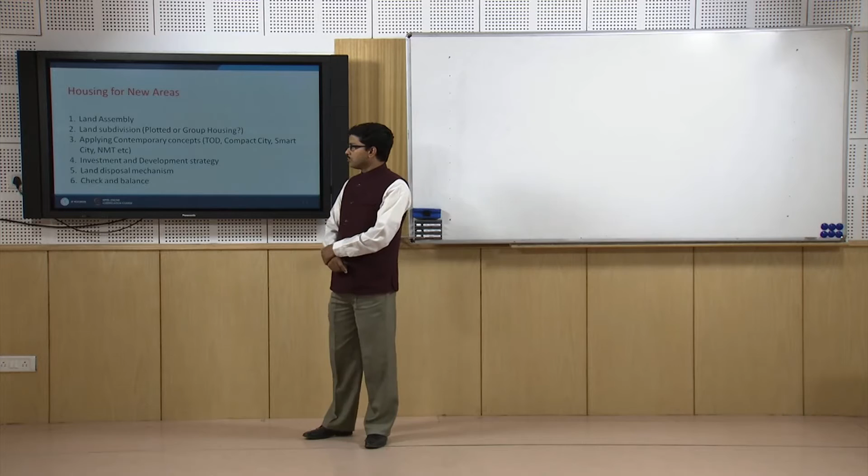We discussed that housing for new areas, the major part of the work involves land assembly, because you need more land to create more housing. So four methods we discussed: land acquisition, land readjustment, development control, or public private partnership. Through these methodologies you can assemble lands.

The second part will be land subdivision. Land subdivision is basically the methodology to divide a bigger chunk of land into small pieces of land based on our requirement, which may be in terms of plotted housing and group housing. We will discuss these one by one today and in the next lecture.

After this we discussed that while we make land subdivision, considering the population and type of housing required, concepts like transit oriented development, compact city, smart city, and non-motorized transportation, and some other concepts should be considered before land subdivision, because land subdivision is the action which will determine the type of housing that will come in a particular plot.

Next we discussed the investment and development strategy. This could be public, by government organization; it could be joint ventures using both public and private investment; and it could be private as well.

Land disposal mechanism: if the land is acquired by the government, that is public land, developed for some township or public purpose. That land should be distributed, allocated, or disposed of through a common lottery system. Otherwise, if it is acquired by a private party or private investor, a separate mechanism can be thought out, and apart from that, there could be checks and balances by the public authority.

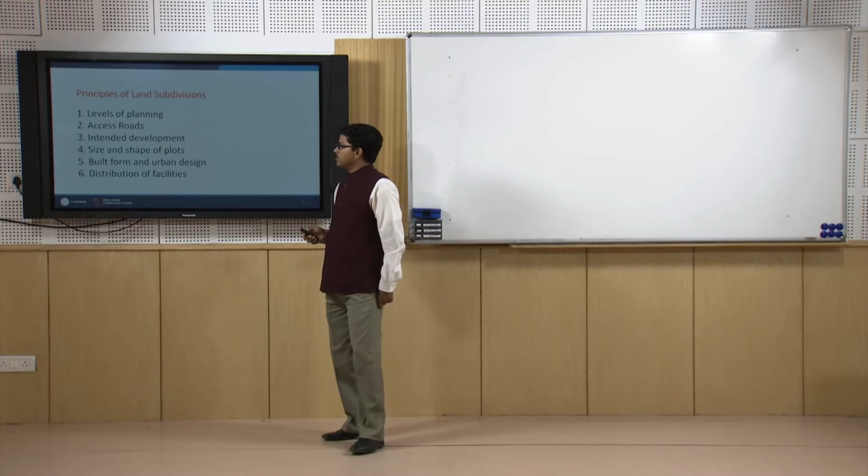We discussed a few principles of land subdivision, like levels of planning. Planning is done at several levels: cluster level, neighborhood level, sector level, and also at the city level.

Based on population, we started the discussion at the cluster level, which is nothing but a cluster of few families, few blocks or buildings which share common facilities in terms of a small open space or small facility. Similarly at the neighborhood level, sector level, or at city or sub-city level, various kinds of facility define its level or hierarchy.

Access roads were also discussed. Two types of access road: local road and collector road. Both give access to the plots. Small roads provide access to smaller plots, bigger roads provide access to bigger plots. The collector road collects all the trips from the local roads and takes them to the arterial road or major junction, so that zone to zone transportation within a city is possible.

Then intended development beyond the city limit, when we go for new housing areas and new housing strategy - our intention, what kind of development, what scenarios of development we want to have. Based on that intention, that vision, how do you want to see the city, those kind of parameters can also influence the land subdivision exercise.

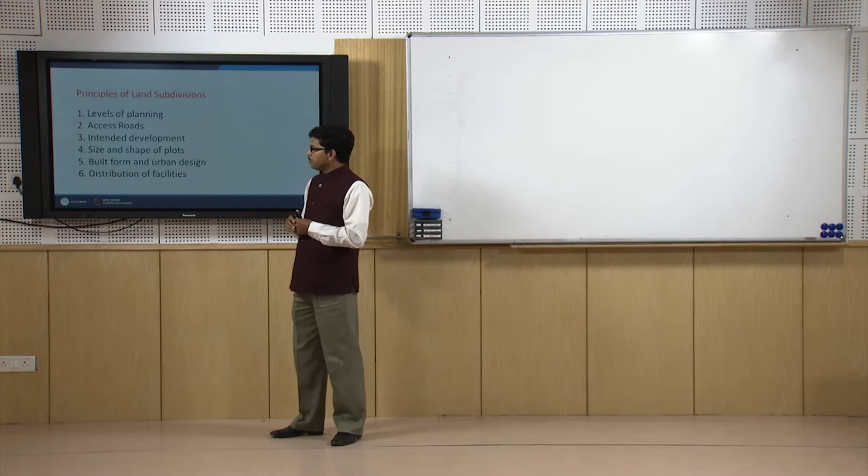Fourth, we discussed the size and shape of the plot. The size and shape of the plot should be such that wastage of land is absolutely minimum, because land is a very scarce commodity. The size and shape of the plot should be optimum, and it should be determined by calculation of the population to be accommodated within the plot, and accordingly the size can be determined.

Then built form and urban design. Urban design consists of more than one building, more than one block, more than one building complex in different plots. That's urban design - how we can bring some harmony, some concept, some visual continuum in a series of plots or building blocks. That's urban design as a whole. Apart from that, there are features like built form, other built forms, which can also be integrated in the overall development of the building.

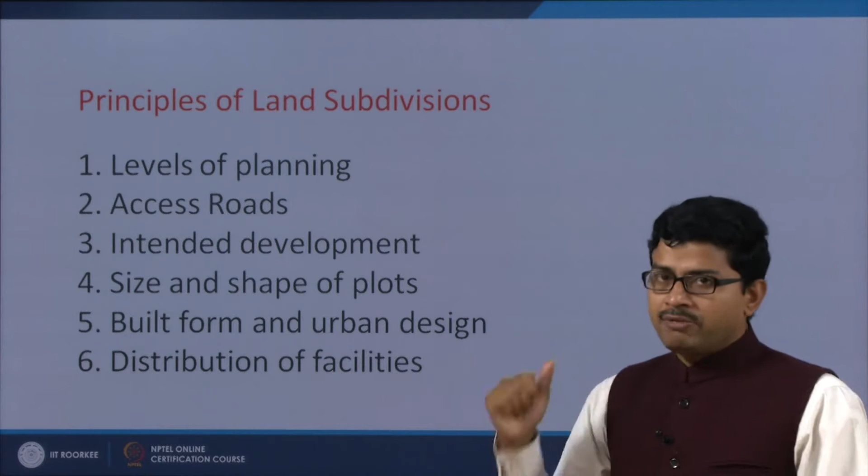Then distribution of the facility, which is done at various levels - cluster level, neighborhood level, and sector level. Now, based on this discussion, we will have a discussion on plotted housing. Plotted housing is one subset of the larger land subdivision around the city.

So around the city, for the new areas we are going to develop for the future population or future housing, some part could be plotted housing and some part could be group housing by and large. Plotted housing, as discussed earlier, is basically small plots.

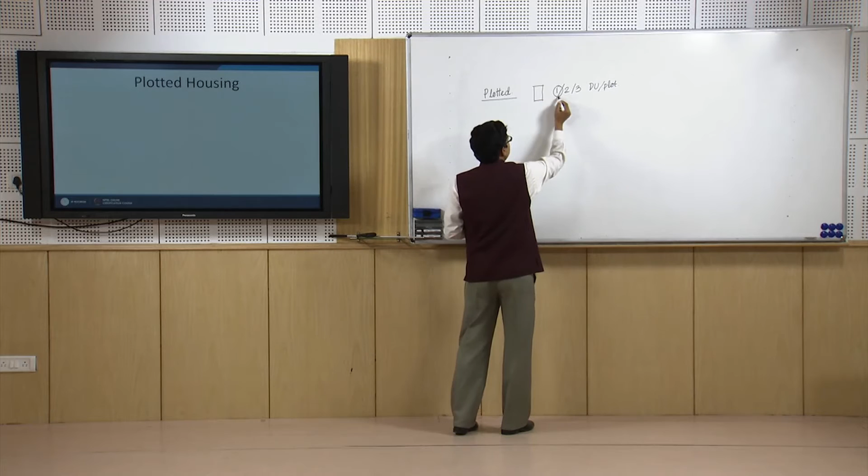Which can accommodate minimum 1, or maximum 2 or 3 dwelling units in a particular plot. So 1, 2 or maybe 3 dwelling units per plot can be accommodated. But here the land ownership or the plot ownership belongs to the first owner, who is owning the plot.

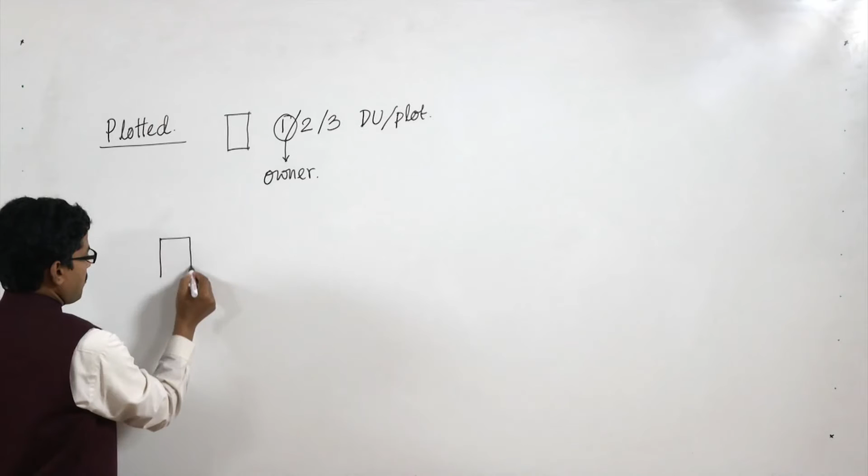And maybe the second and third owners, for them the house can be given on rent. So while we talk about total ownership in terms of buildability, the basic differentiation of plotted housing from group housing is that within a plot the owner enjoys the ownership of the building and the plot both. So if this is plotted housing, ownership belongs to the plot as well as the building, both.

But in group housing, it is not like that. The plot is bigger and there are more number of buildings, so that many people can stay together and enjoy some common facility. Here the ownership of the plot is by community, not by individual, but ownership of the apartment or unit you are staying in is by the individual.

That is the fundamental difference between plotted housing and group housing. Based on that, we will discuss plotted housing and its implication. In plotted housing, an individual owner enjoys sole ownership of the land and the plot. He can do whatever he wants to develop, the kind of building, landscaping, coloring, etc. But definitely some development controls are there that he has to abide by.

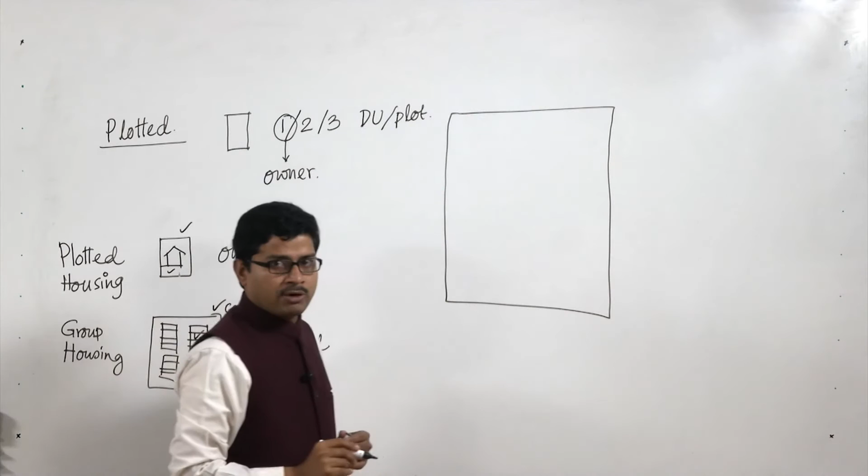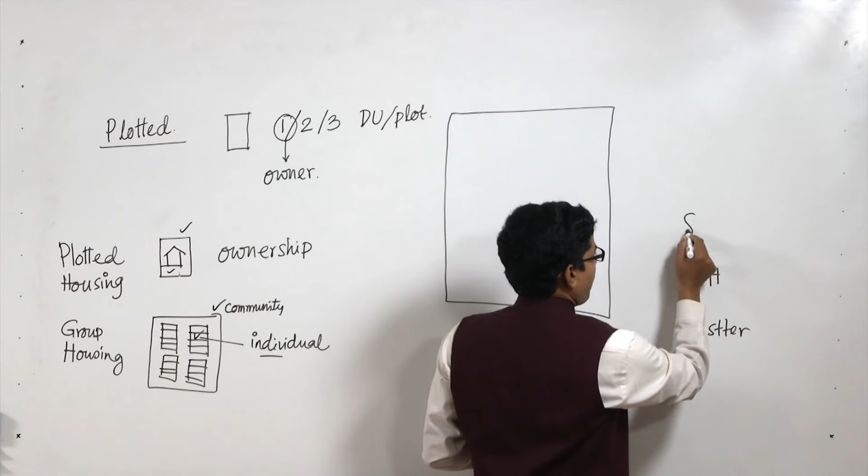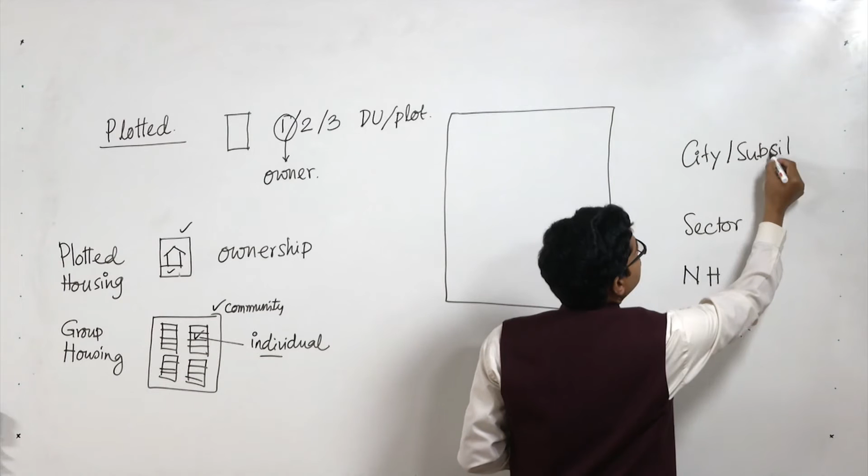Now if this is a neighborhood, I hope you have already understood the concept of neighborhood and cluster. In the last lecture we discussed the concept of cluster, neighborhood, sector, then city or sub-city level. So we are talking about how at the neighborhood level we can further subdivide the plots into smaller pieces for individual owners.

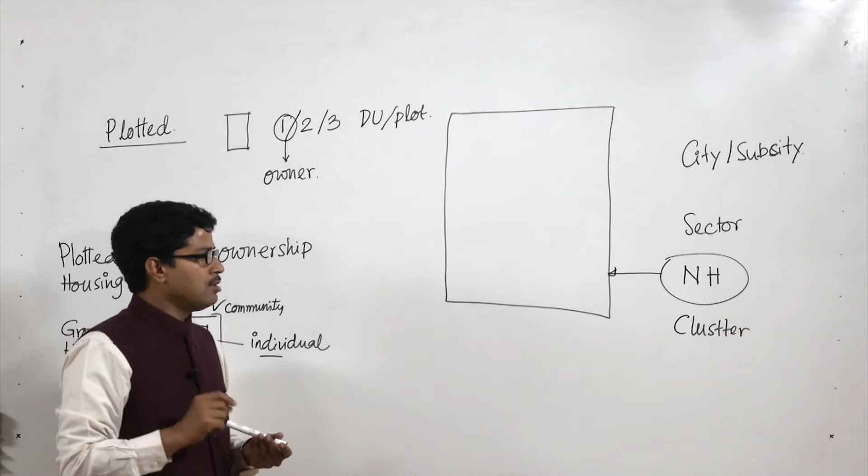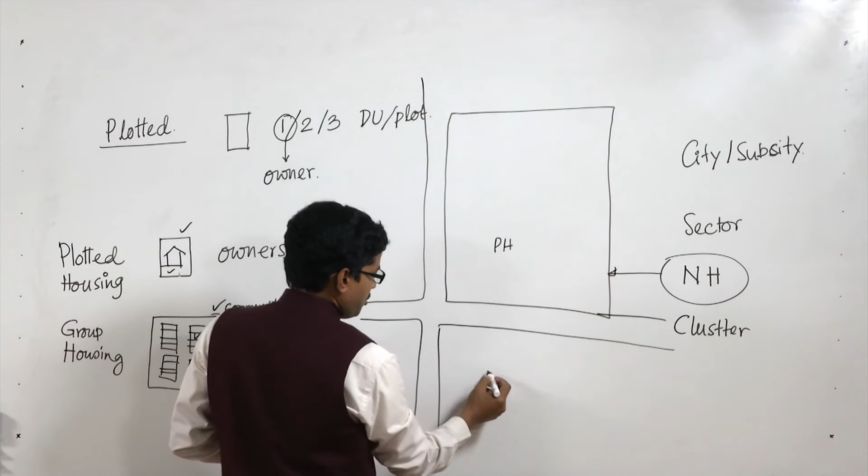That is the plotted housing. So probably you have earmarked various sectors or neighborhoods in overall land subdivision, and you have earmarked this plot as plotted housing, this plot as group housing, or this plot as cooperative housing, whatever it may be. So how will we proceed for the plotted housing?

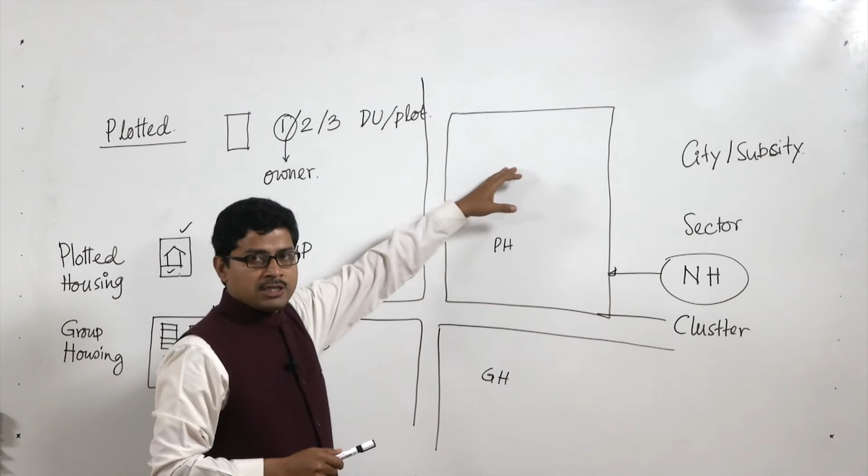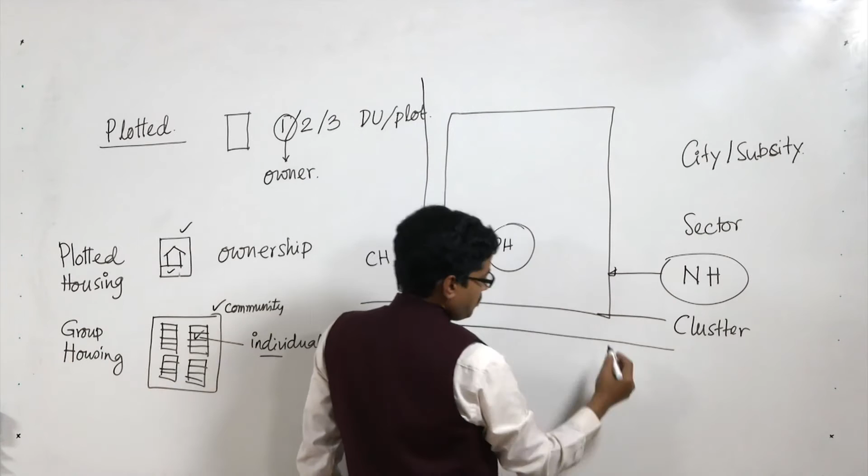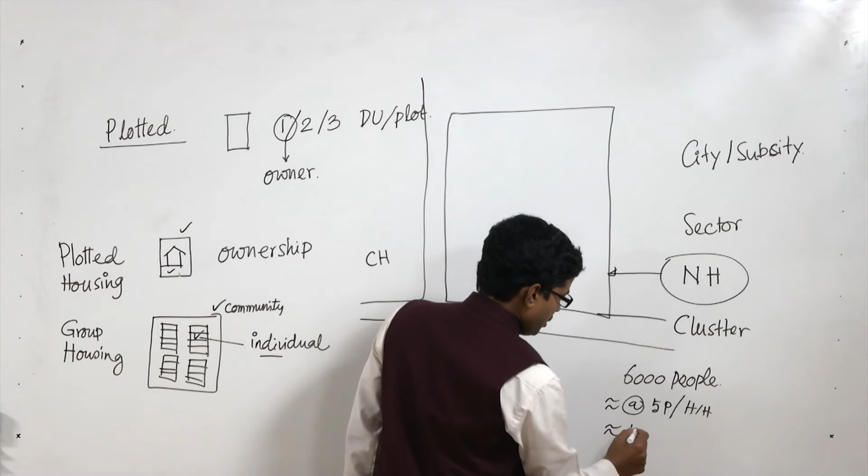Based on the overall housing strategy or city plan strategy, some population will be assumed. Based on the population we can determine the number of plots and the size of plot. For example, in a neighborhood, in a population, we have to accommodate say 6,000 people. If we consider 5 people per household, that will equate to 1200 dwelling units, meaning 1200 families will be living there.

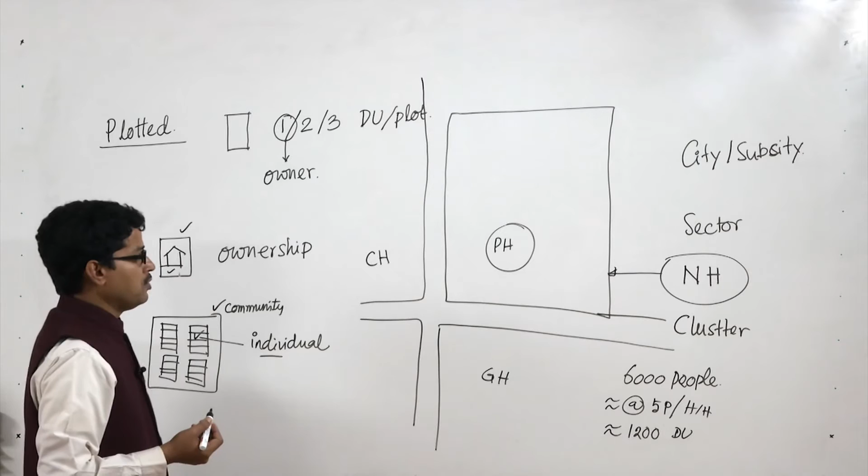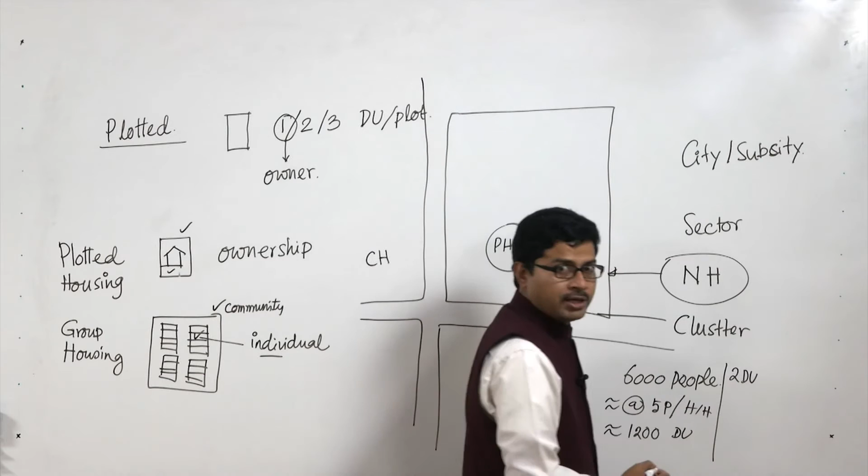So for discussion or convenience, if you consider that two dwelling units or two families will be sharing each plot, then the number of plots will be 600. Now these 600 plots can be higher income group, middle income group, or lower income group.

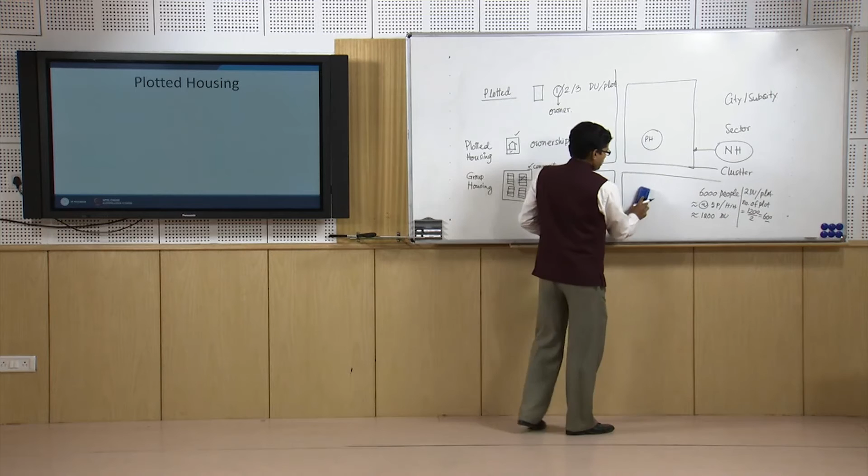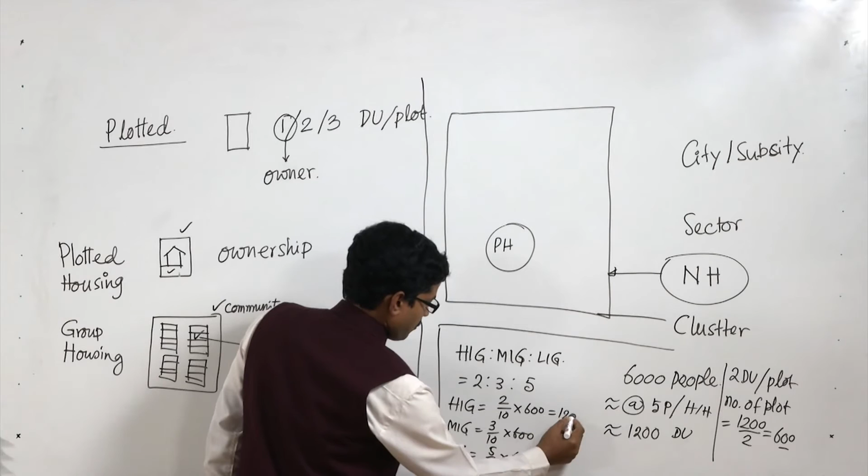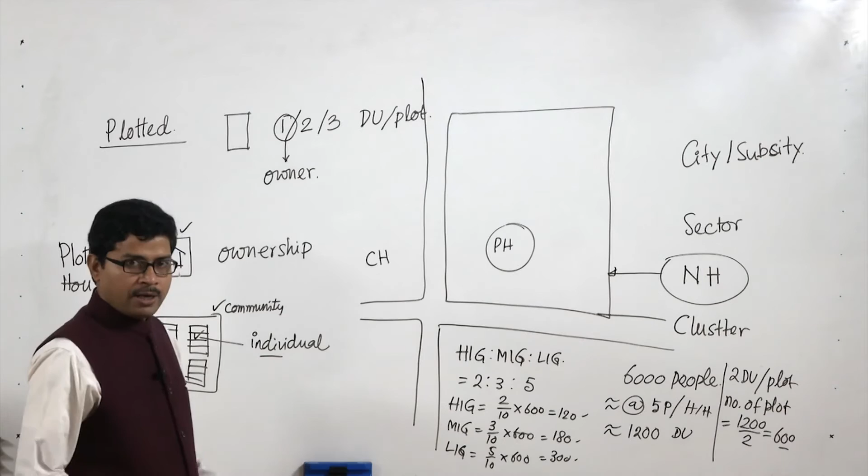Based on your overall strategy or mandate given by the housing strategy exercise, you can determine the ratio. Let us say out of 600, your ratio for different categories of housing is HIG is to MIG is to LIG as 2:3:5. So this is the final number of plots you have to accommodate for each particular economic group.

Now based on their affordability, the size of the plot for higher income group, middle income group and lower income group will not be similar or same. So how do you determine the size of the plot? Let us take another example. For convenience we are calculating in a simplified manner, but the actual calculation could be more intricate. Let us understand at least some basic theory and assumptions, so whenever we work we can execute or apply that with simple mathematical calculation.

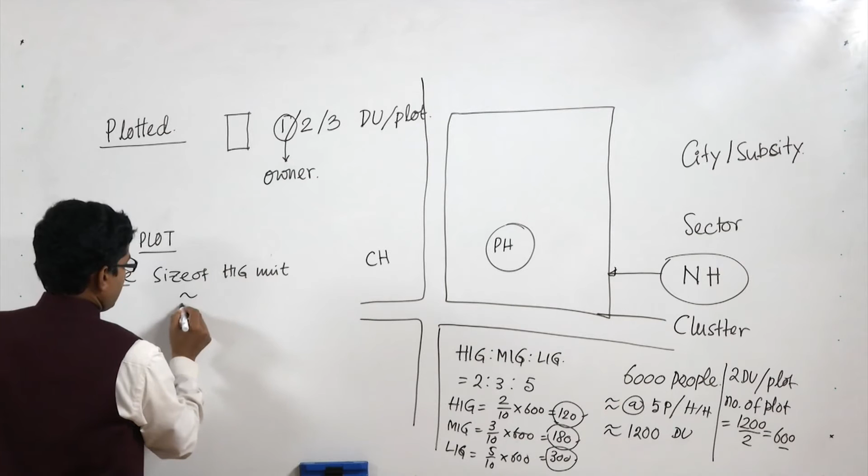Now let us take an HIG plot. Based on the city size or city profile, we can take an average size of the HIG dwelling unit. For example, let us assume the size of the HIG unit is 150 square meters.

We are assuming the plot can be 200, 120, or any amount - let's say 150 square meters. If we want to accommodate 2 units per plot, this is the built up area. So built up area per plot, considering two dwelling units per plot, will be 300 square meters. This becomes the total built up area in a plot for a higher income group plotted housing plot. Now let us go to the discussion of floor space index.

2-3 lectures back we discussed that density is very much related to the concept of floor area ratio or floor space index. FSI is nothing but the total built up area divided by the plot area. Now if this is the total built up area, and let us assume the plot area as A, based on our FAR formula we know FAR is equal to total built up area divided by plot area. So you can check the building regulations and development control whether the FAR provided for that area is 2, 1.5, 1.75, or 2.5.

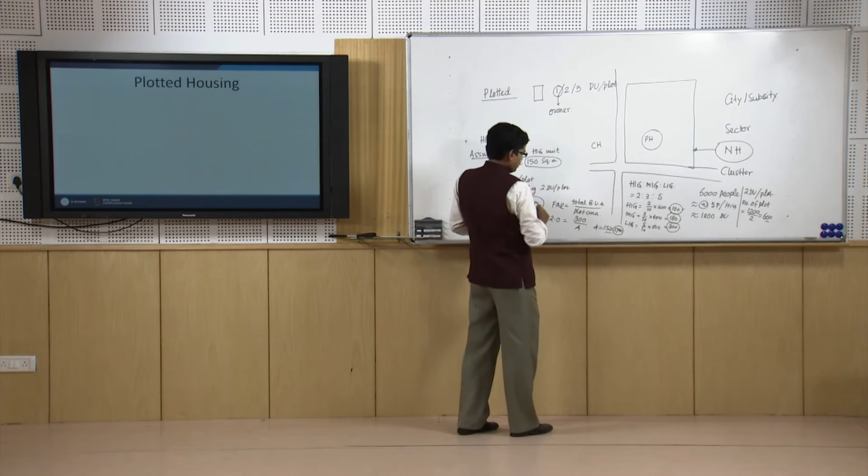So let us assume that FAR is 2, and total built up area we know is 300. So plot area is A. Therefore A is equal to 150 square meters. So this becomes the size of the plot. Similarly we can calculate the size of each plot for HIG, MIG, and LIG.

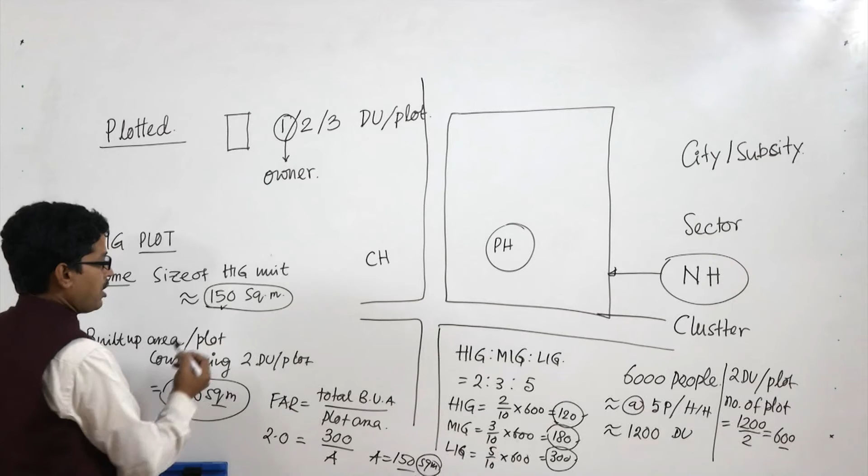Now if you want to make a variation of plot sizes, it is possible that within the same economic group you can bring a little more variation. For example HIG2, HIG1, HIG3, MIG1, MIG2, MIG3, starting from the basic unit to a little higher unit to a little bigger unit. So instead of 150 square meters per unit, you can consider 120 square meters, or 200 square meters. So HIG could be 200, 150, 120, and we can assume MIG as 100, 80, or 60 square meters.

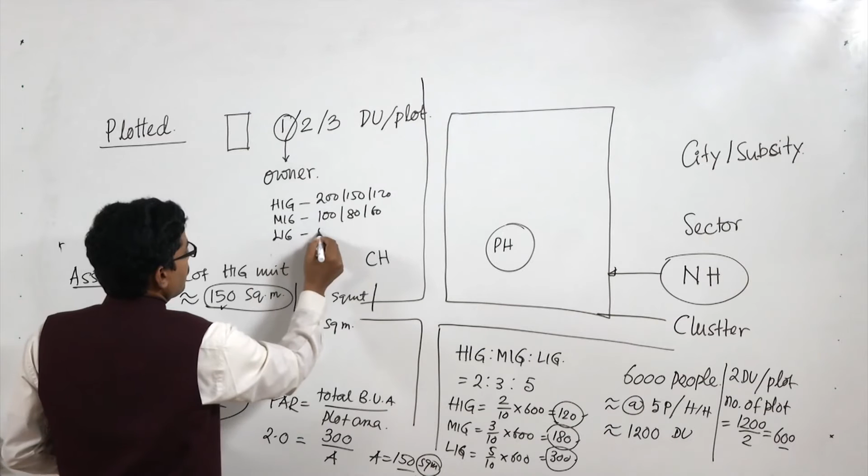Similarly LIG could be 50, 40, 30. So these types of variations you can bring into a project, and play with the size of the plot area. Now once you come to the plot size and the number of plots, it is up to you how you are going to accommodate all those plots in a particular given chunk of land.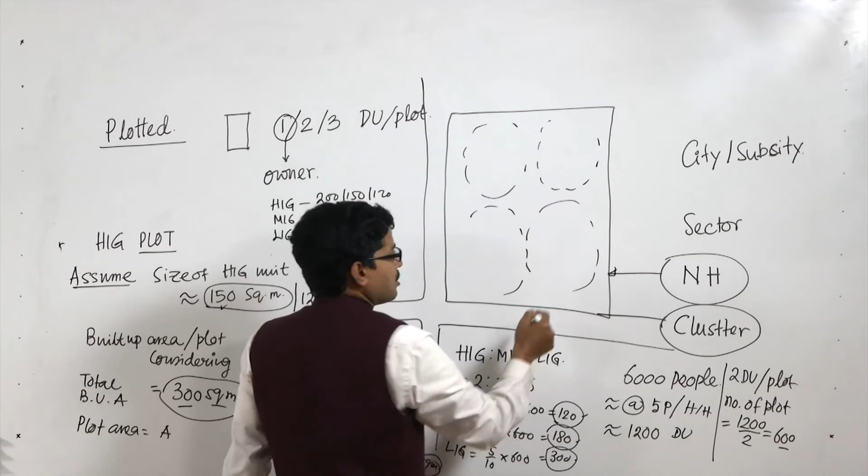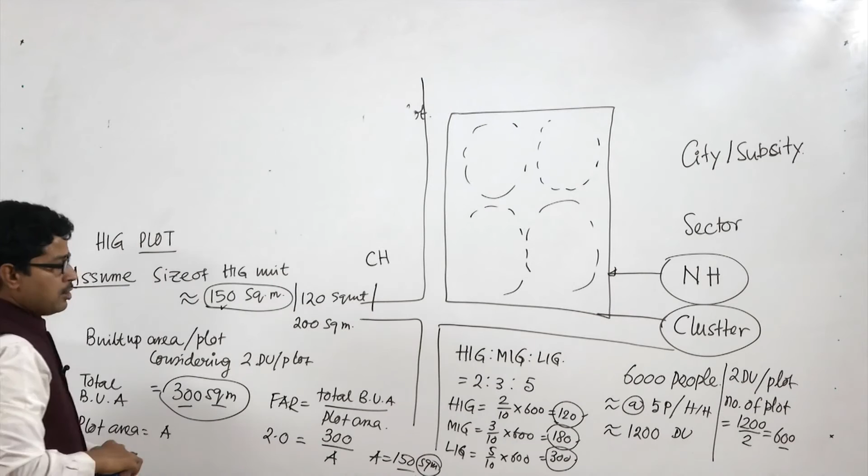So here you have to go back again to the concept of cluster which we discussed. Traditionally in a neighborhood there could be 4, 5, or 6 clusters, based on the facilities. Now at this junction, let us take a look at what are the ingredients which make a neighborhood, in terms of facilities and land. So here basically there are 4 types of components you are dealing with to make up plotted development in a particular piece of land.

The number one is the plot itself, plots for houses. Number 2 is the facilities - commercial, school, health, educational, all these things are facilities. Number 3 is recreational or open space, and the 4th is your network. Now these are the broad 4 components of your plotted housing.

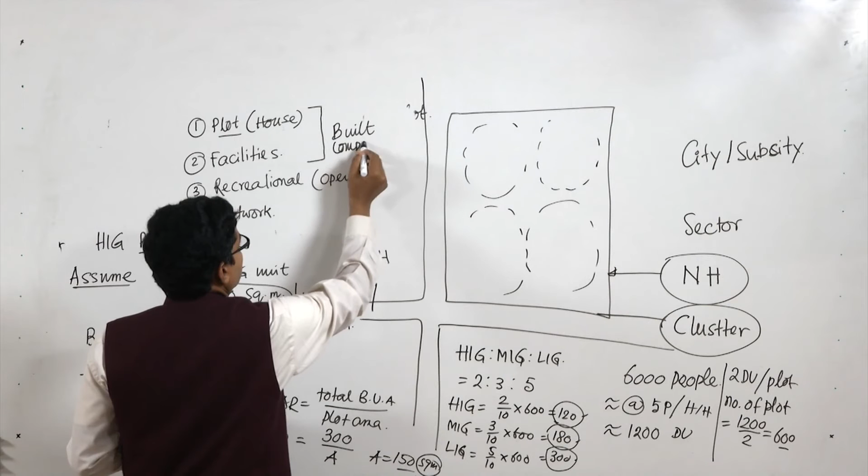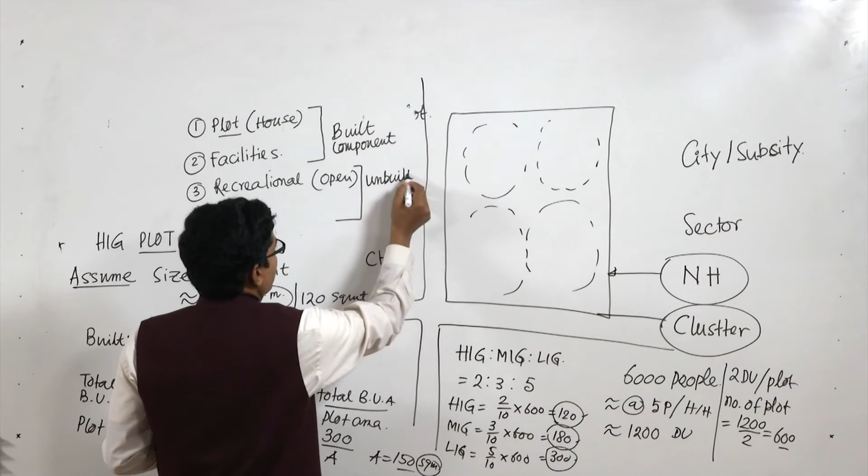Out of these 4 components, 2 components are basically built components, and the other 2 are basically not built or unbuilt components. The purpose of giving facilities as a built component is to enable houses to get essential services.

Like day to day services, vegetable or grocery, or any types of facilities which we want from our neighborhood on an everyday basis. The purpose of recreational space is to give the people living there psychological or mental relief. When you go to a park or playground, children playing get mental satisfaction, so this is one of the important needs for recreational space. You meet with your people, your friends or relations, so recreational space is fulfilling your social need, and facilities fulfill some of your basic needs.

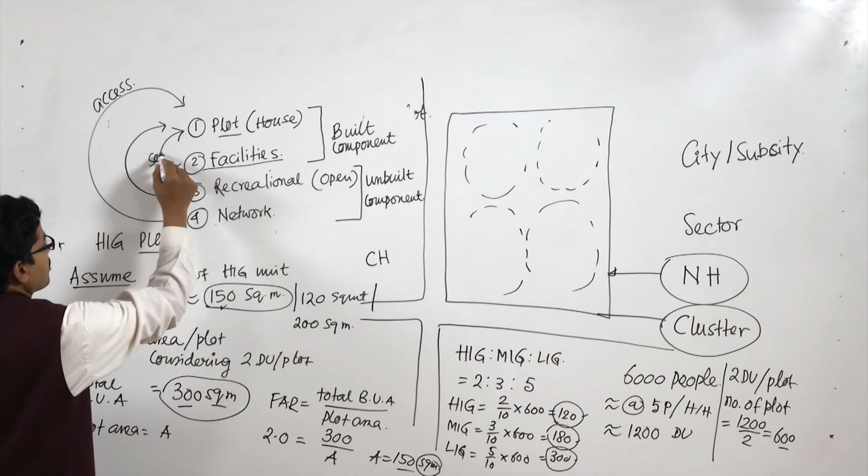And the network, which is another component of the unbuilt element, gives you access. So facilities give you essential service, recreational spaces fulfill your social or recreational need, and network fulfills your access or connectivity need. Now it is very important to see how, in a plotted development, you keep a balance between the built component and unbuilt component. The unbuilt component is very important to make a relation between the built and unbuilt component.

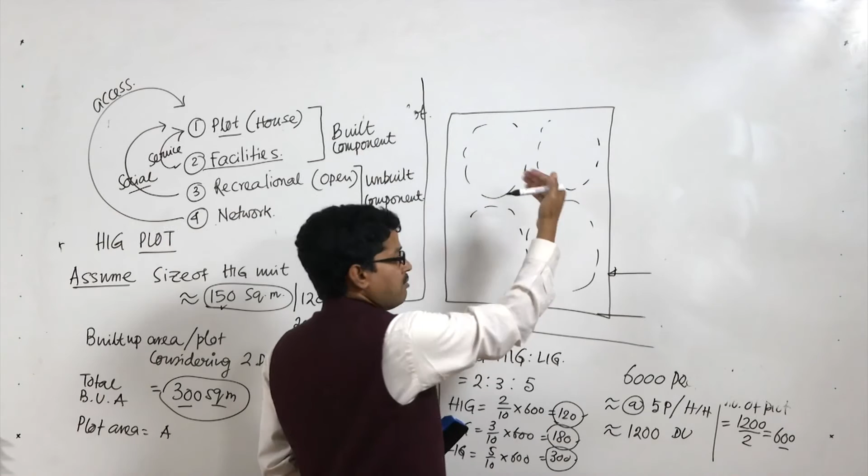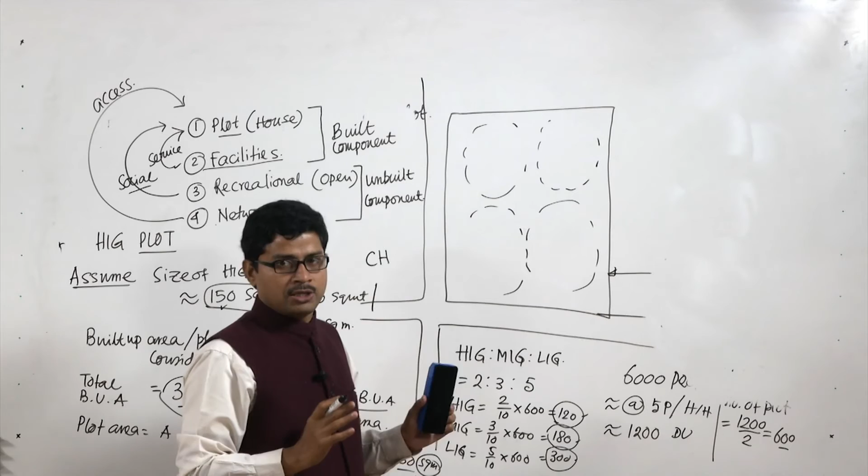Now there could be 2 approaches. At this point we have to go back to the discussion of hierarchy of planning which we covered in the last lecture - hierarchy in terms of cluster, neighborhood, and then higher levels of planning like sector. But here we are dealing with a simple single neighborhood for convenience of discussion. In one neighborhood, how can we come out with a specific distribution of plots or land area for plotted areas and network areas? For that we can distribute the open space or open recreational area and facilities.

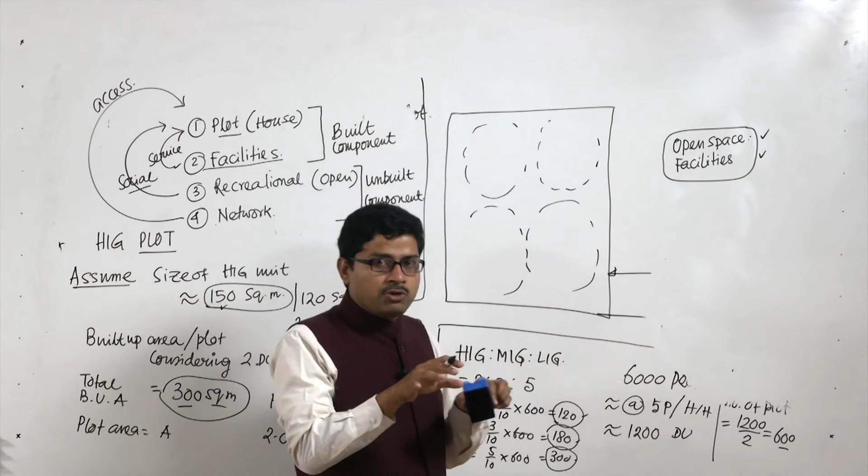So these two are very important parts: one is the unbuilt component, another is the built component. These two areas, how you are distributing open space and facilities over the whole area, based on that you can take two approaches. One approach is you can go for distribution with a hierarchy approach.

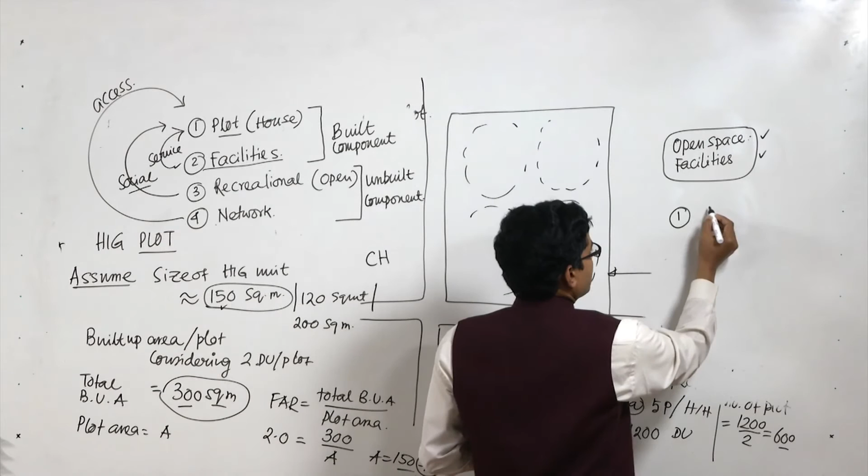Hierarchy approach enables that if this is the total component, you can distribute it over 4 components, and each of those 4 components can have further 4 micro components. So this is the hierarchy approach.

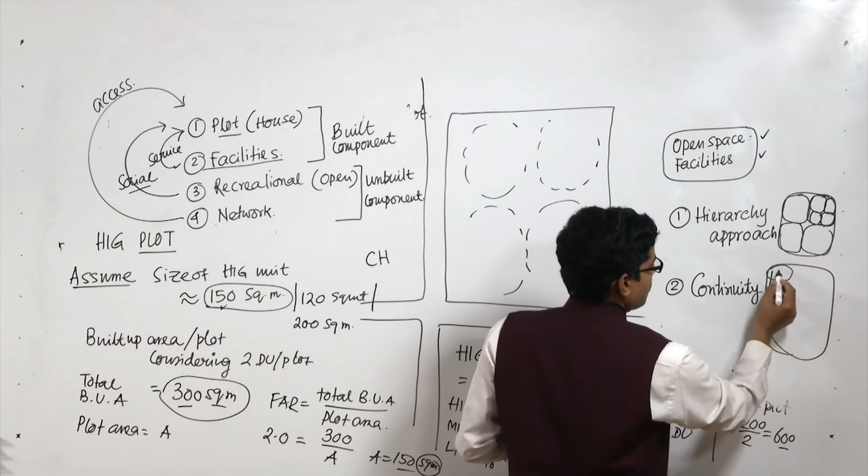Another approach could be that you distribute the open space and facilities as a continuity. So if this is your neighborhood, your clusters could be placed at different locations in different fashion, and some part could be a continuous area to provide facilities and open space as a continuous set of access, continuous facilities, or continuous accessibility. So from every location they can access it.

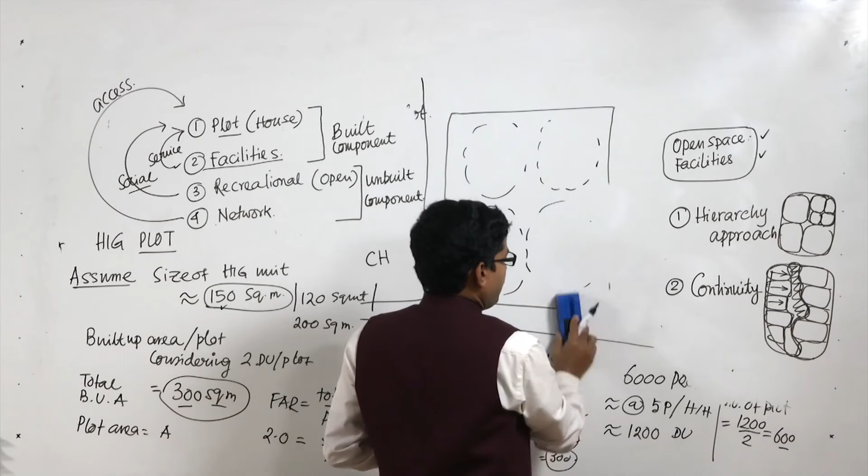Now based on these two, they have different advantages and disadvantages. If you provide facilities and open space in the hierarchical approach, that means you are placing open space for every sector, every component separately. You provide facilities for every cluster separately. But here, you are not providing open space and facilities per cluster separately, but as a continuous stretch of land.

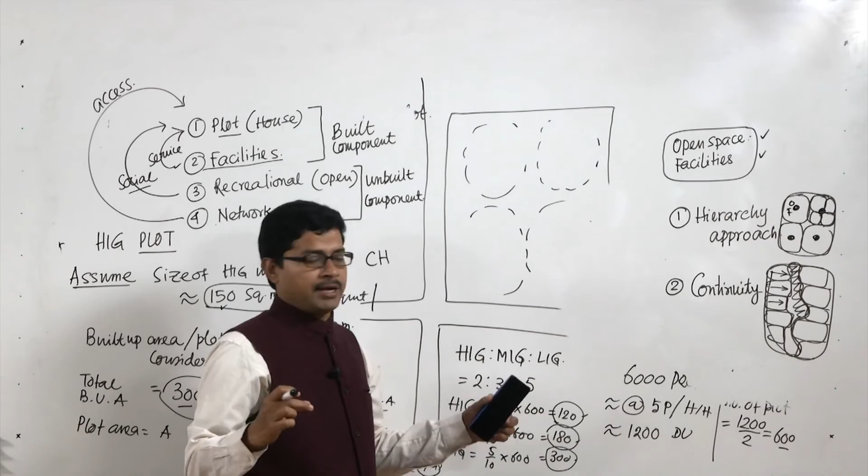So in the hierarchical approach, the advantage is that it is distributed almost evenly. But here, in the continuous approach, the distribution could be even or it can be centralized. Basically the distribution is centralized, because the facilities and open space are given at the center, not on the outer side, assuming everybody will be able to reach that facility with easy connectivity.

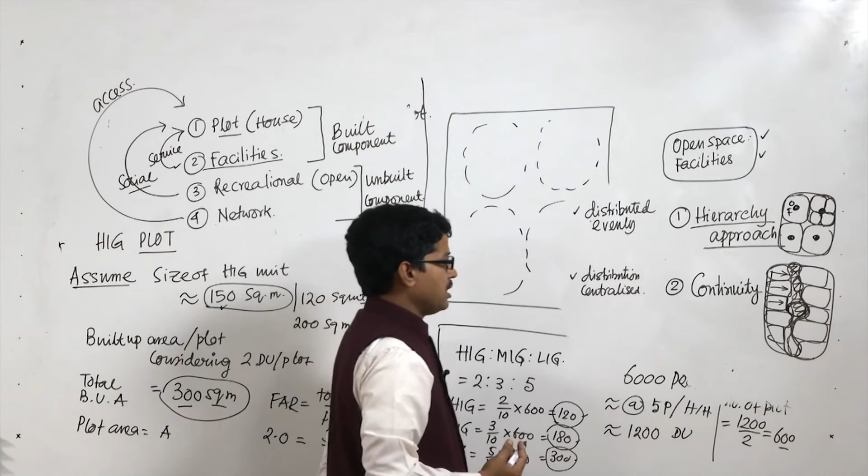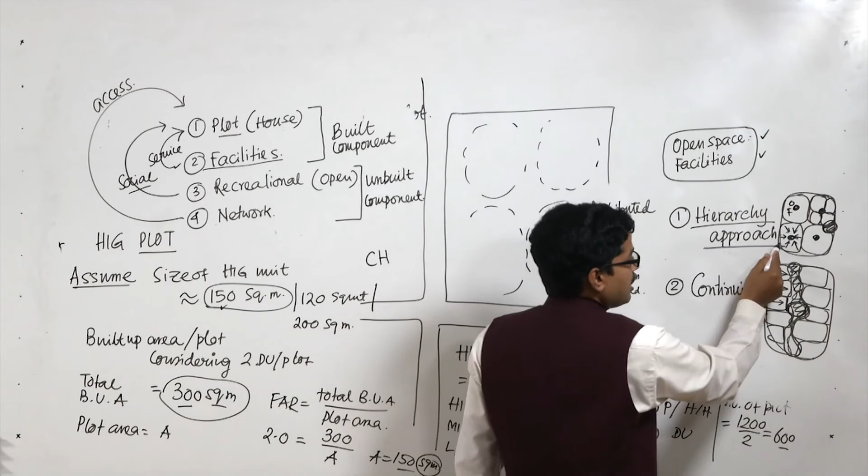Apart from this, it has advantages and disadvantages in separate aspects too. In the hierarchical approach everybody will be able to reach their facility within vicinity, but for bigger facilities they have to walk far. For example, there is a larger facility, say a primary school. Somebody living here can approach the local open space or toddlers' area maybe 40 to 50 meters from their house, but for accessing a primary school or a bigger facility at the neighborhood level, they have to walk a lot.

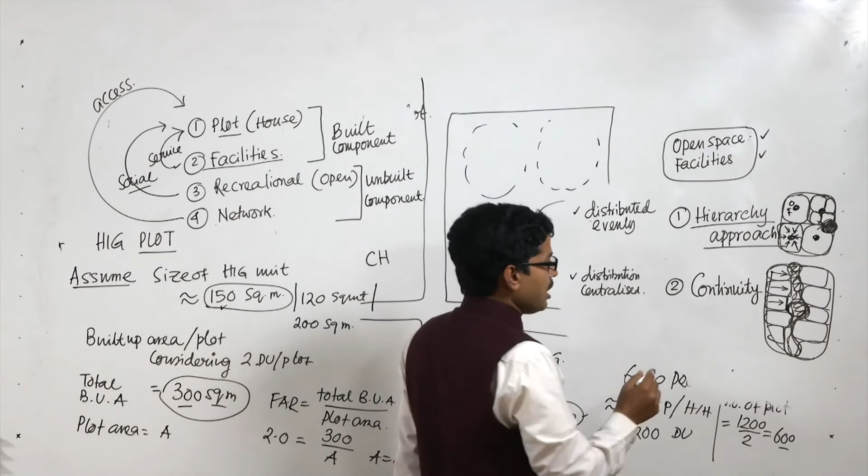On the other hand, if the continuous approach is taken, we can place various kinds of facilities at different locations. So everybody gets all the facilities, but with a different type of accessibility. These two approaches give us two different scenarios or methodologies to make a plotted housing layout.

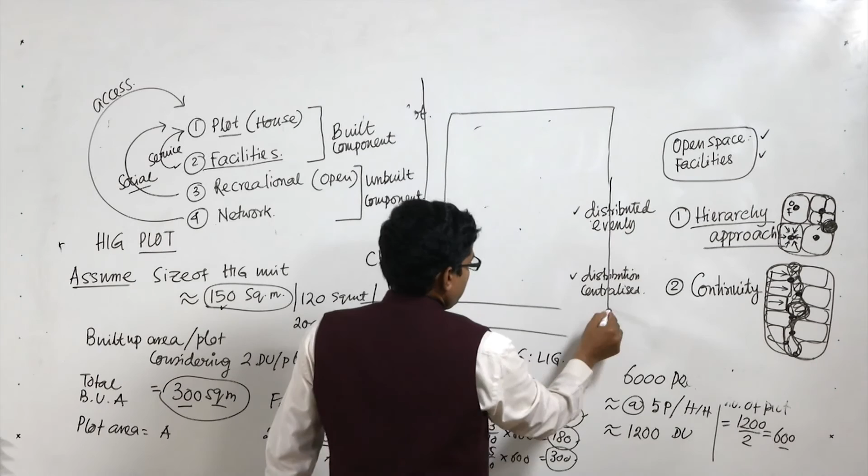Now let us discuss some elements related to network. We discussed the open space and facilities which could be distributed hierarchically or as a continuous area. Now for the network, the objective is to connect the open space and facilities.

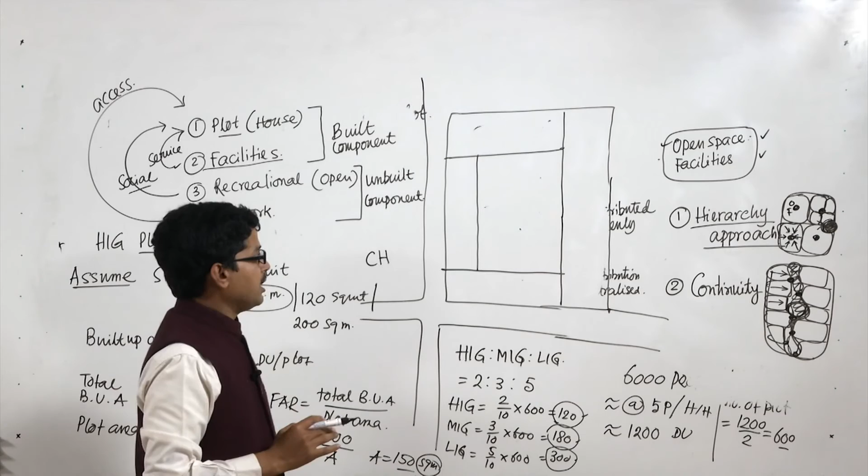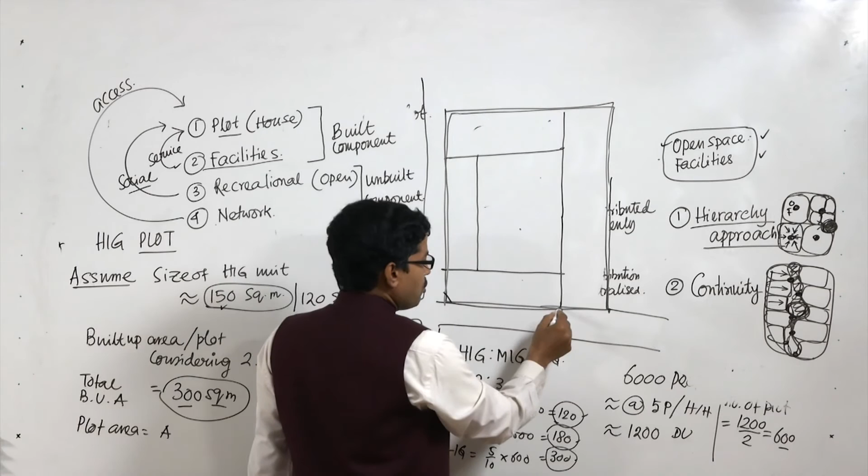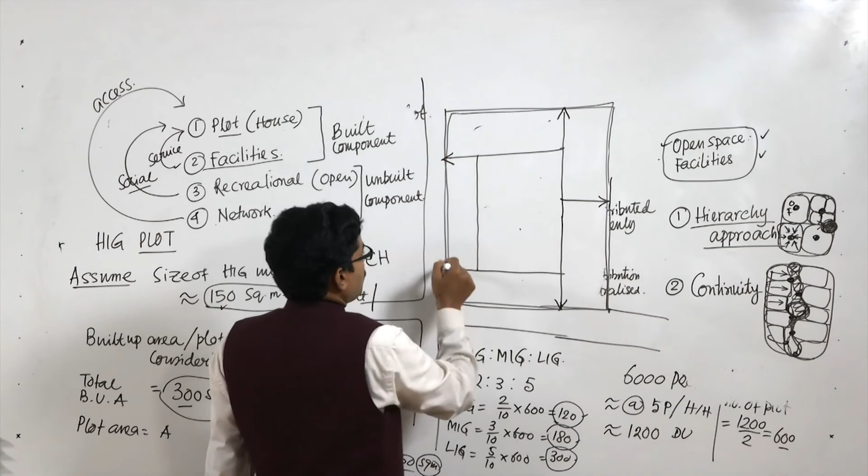Some basic principles should be maintained for laying the network or connectivity. If this is the peripheral road, usually a higher level road - maybe local, collector, subarterial, or arterial road - at that higher level we should not make too many punctures by giving local road access. So this is one entry, this is another entry, this could be another entry. Around the periphery, at most we can give not more than one puncture on one side, one puncture on this side, another on this side. So interface with local road and the higher road should be minimum at the periphery.

So in the periphery, the puncture or interface with local road and the higher road will be minimum.

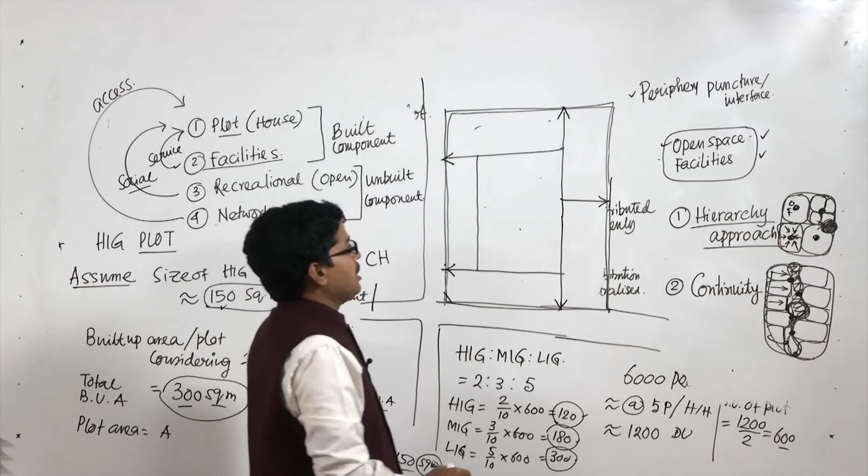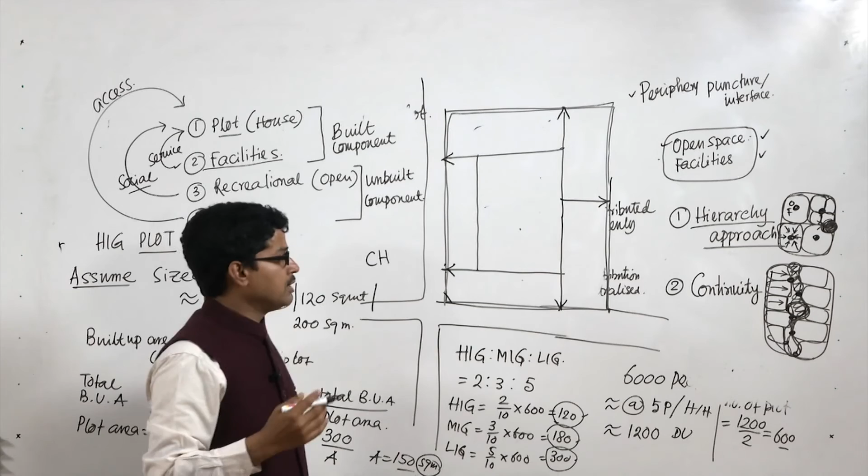Second, inside the neighborhood you can make n numbers of junctions with the local road, and that is inevitable. For example, there could be junctions like this, there could be roads like that. Even if these junctions are very close, like 40 or 50 meters apart, it's not as dangerous as too many punctures in the peripheral area, because the peripheral area has high speed or more traffic. So we don't disturb the higher traffic road with many punctures, maybe one or two.

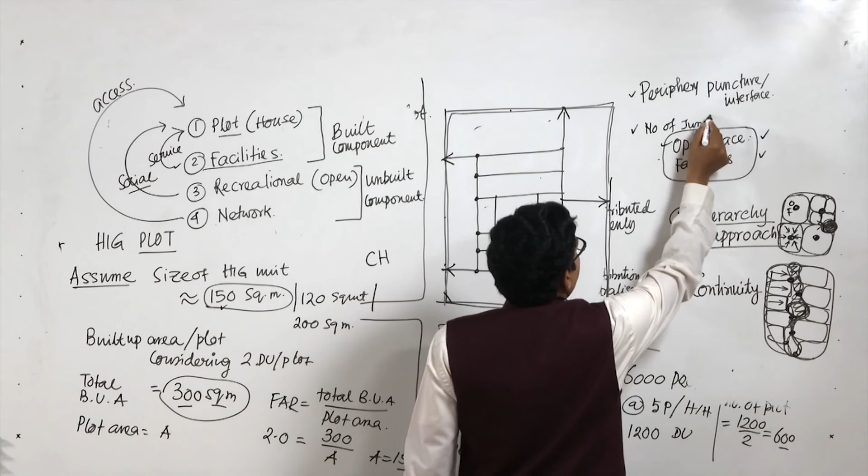So that is principle number 2, the number of junctions inside and outside. Then another very important part is the segregation of vehicular and non-vehicular circulation. Here you can see it is based on the vehicular road network, which may be 10, 11, or 12 meters, but what about the non-vehicular, those who are walking?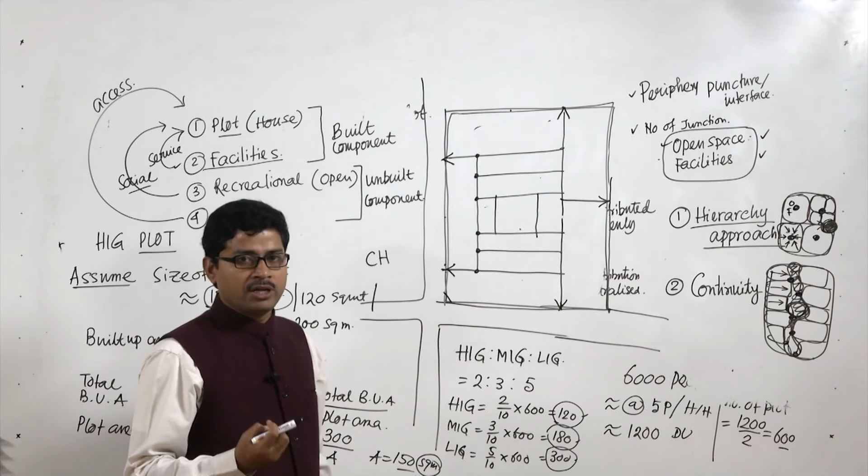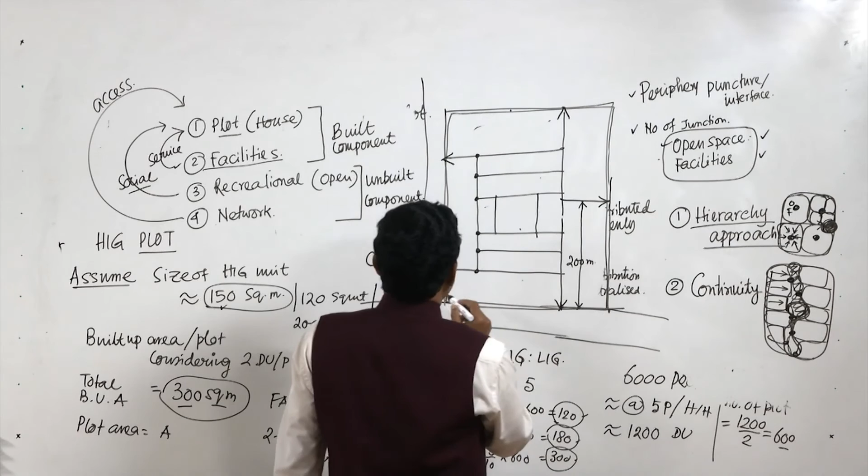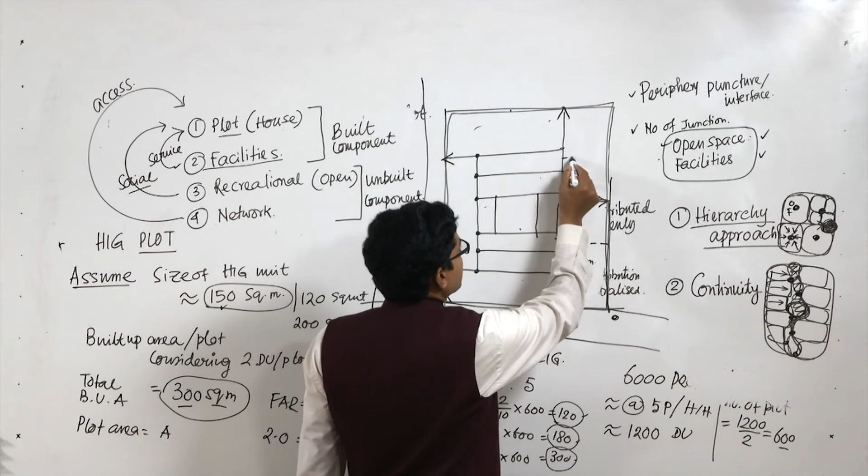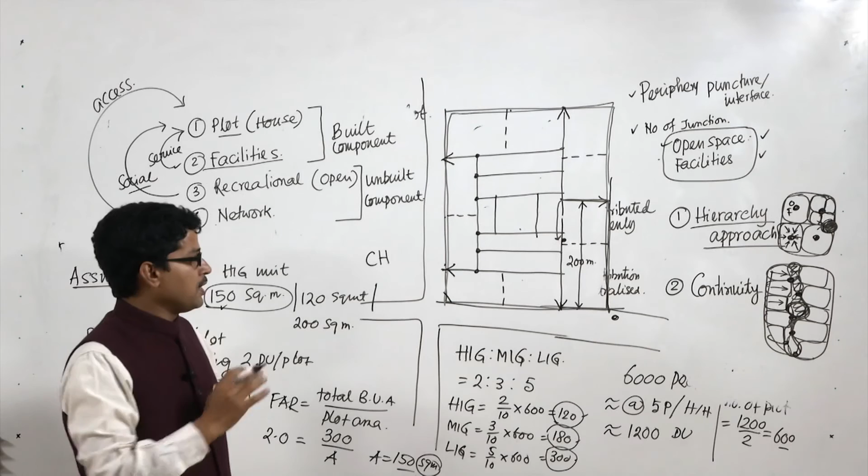Non-vehicular road network and walkability is also a very important parameter. If you find the distance is very long, say more than 200 meters, think of an example where there is a bus stand here and my house is here. How do I come here? I have to go there and come like this. So why not have a pedestrian connection here, or maybe here, or here. In several locations, irrespective of your vehicular connection, we can have many pedestrian connections to provide people access to their plots from the public transport terminals or stoppages. So that is another principle: the vehicular and non-vehicular interface.

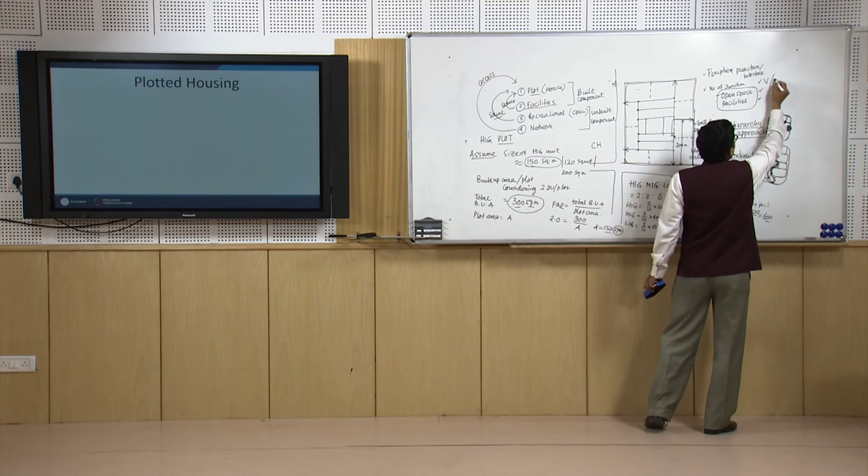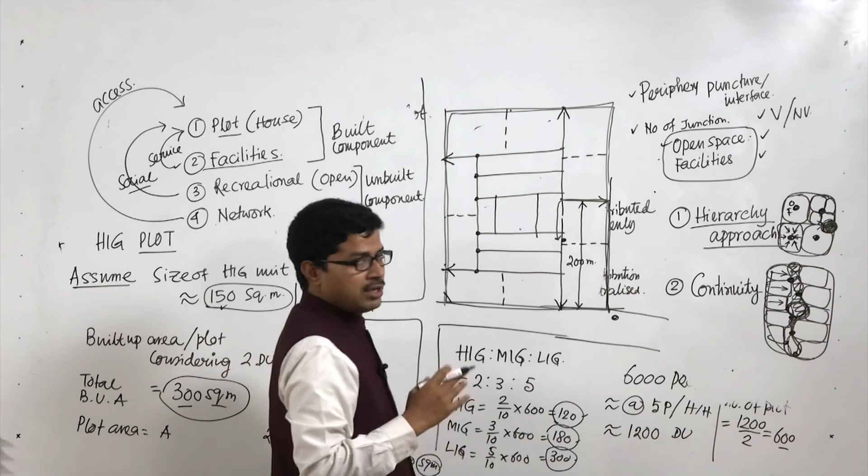Apart from this vehicular and non-vehicular interface, inside the neighborhood, based on your principle of hierarchy approach or the continuous approach, you can make the road network in a different fashion. Now let us have quickly some pictures of plotted housing, so that you can understand the principle in a better way.

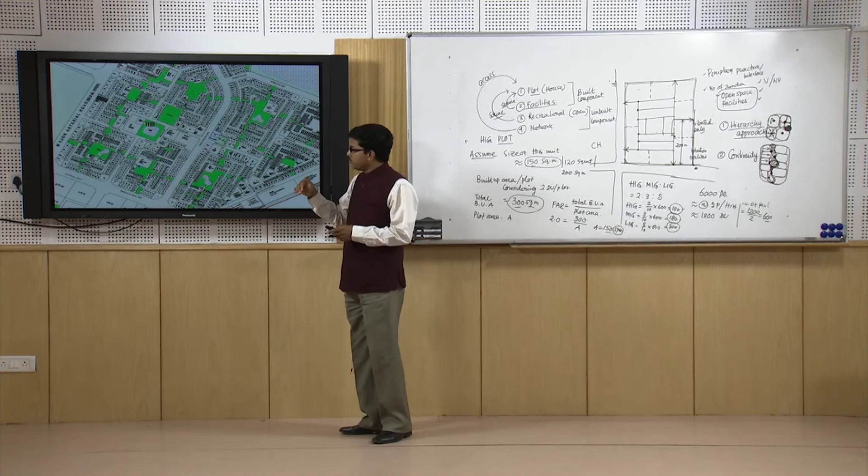Here you can see this plotted housing is done on the basis of the hierarchical approach. This is one neighborhood, and every neighborhood constitutes one separate cluster. The facilities are distributed, although the recreational open space is continuous. As shown before, all the facilities are distributed over the neighborhood, and the punctures of the local road from the major roads are only one, not multiple, to reduce accidents and congestion. But inside the neighborhood you can have multiple junctions and punctures.

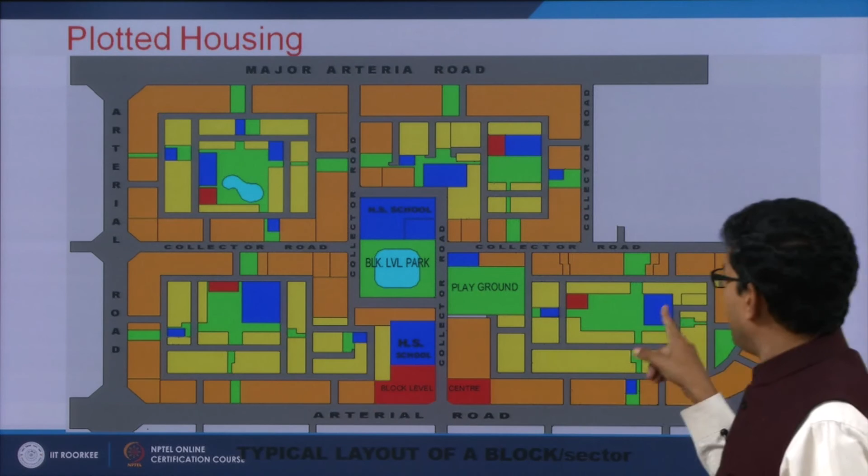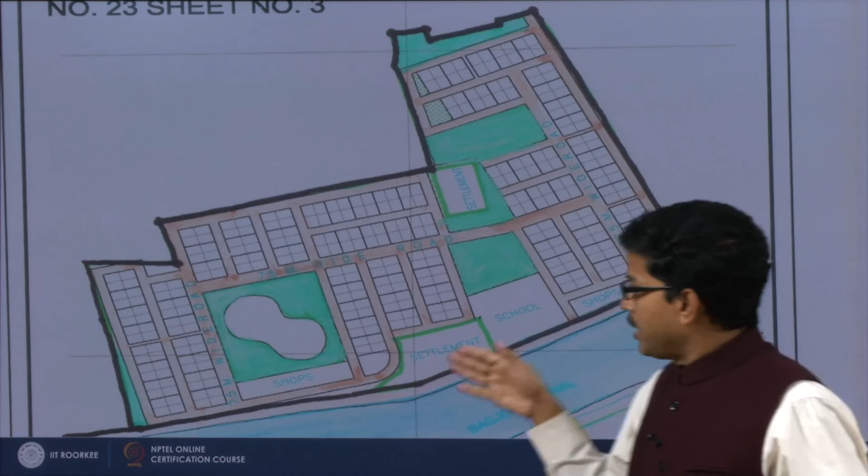This is a plotted layout for the very poor people, the low income group housing. Here you can see that even if the vehicular puncture is not there, at various points the pedestrian punctures are there, so that people can walk and reach their destination. So these kinds of elements are there in a plotted housing.

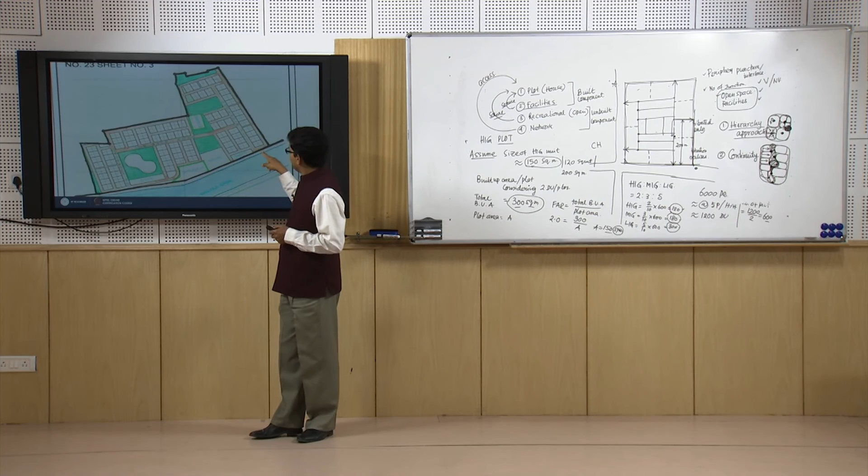Here also you can see the pedestrian puncture, and this is the major road. Inside the road you can also see various different kinds of punctures, I mean the local road. That is possible within the neighborhood, but outside the neighborhood we cannot have more punctures, maybe 1, 2, maybe another 1, 3. So that is the major concept.

Now in this layout you can see the second approach, where the open space and facilities are provided as centralized green areas, or in a continuous fashion. In this continuous fashion, one element is clear: you won't find a very defined hierarchy of open space. The boundary of the open space is very irregular, whereas in the earlier example the boundary of open space was very regular.

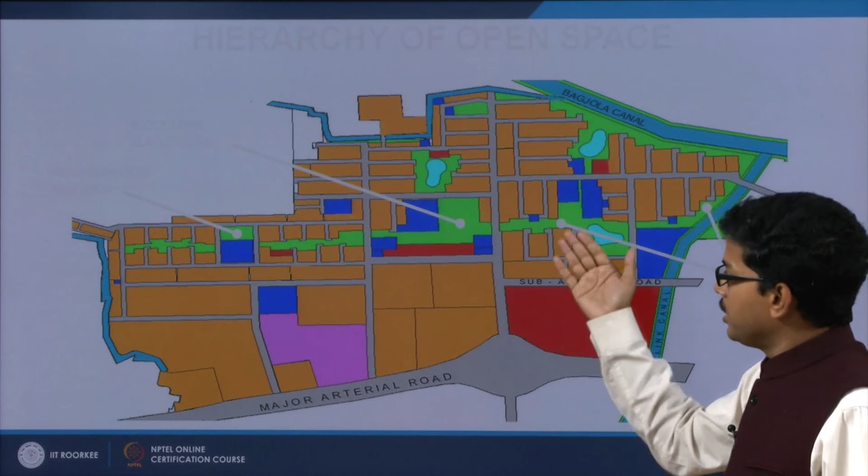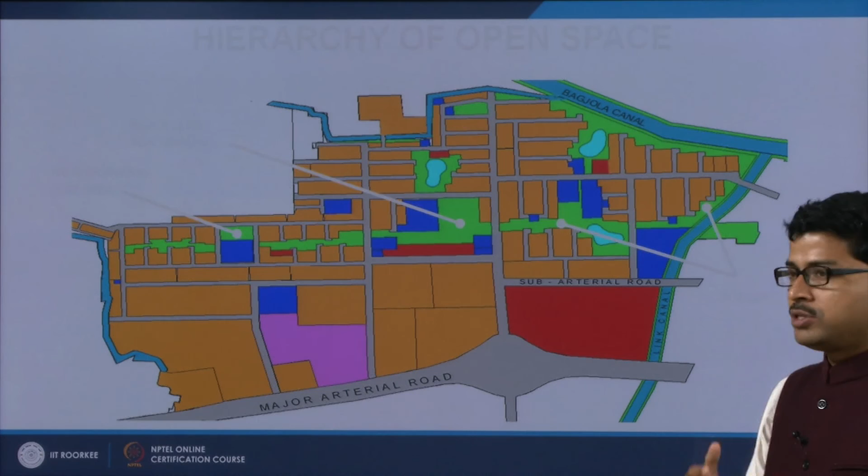Here only the central open space is very regular, which is rectangular, but the other open spaces are not that regular. In this example also you can see the irregular profile of the open space, but this kind of open space gives some feeling of continuity and largeness, whereas maintenance becomes sometimes tedious or challenging. The regular open space is always better to maintain because it is surrounded by the plots. This is another approach, you can see.

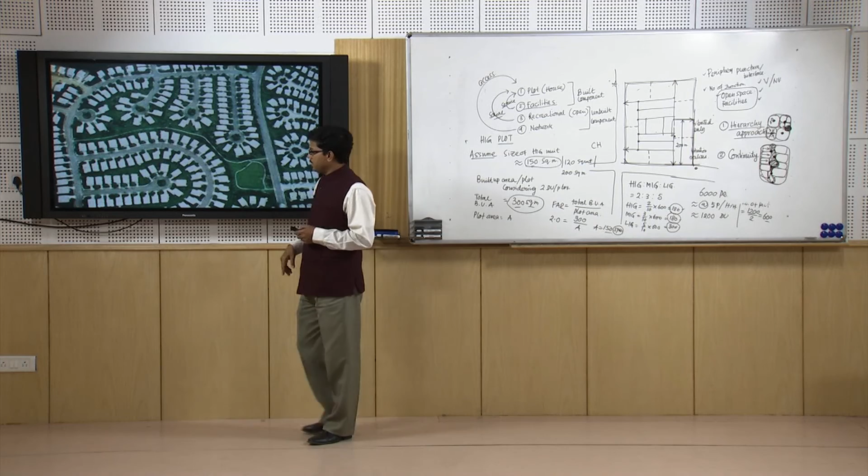But this kind of approach takes a lot of land area to achieve this. So density will be very less if we go to this type of approach, where centralized green areas and open spaces are provided, and local roads are provided as what we call a cul-de-sac, ending as a dead end. It is designed so that a car can take a round and come back to the road.

So this is basically some of the pictures I have shown from the projects. Various projects are there; you can browse through the internet, books, and reports. You can see many examples there, and always refer back.

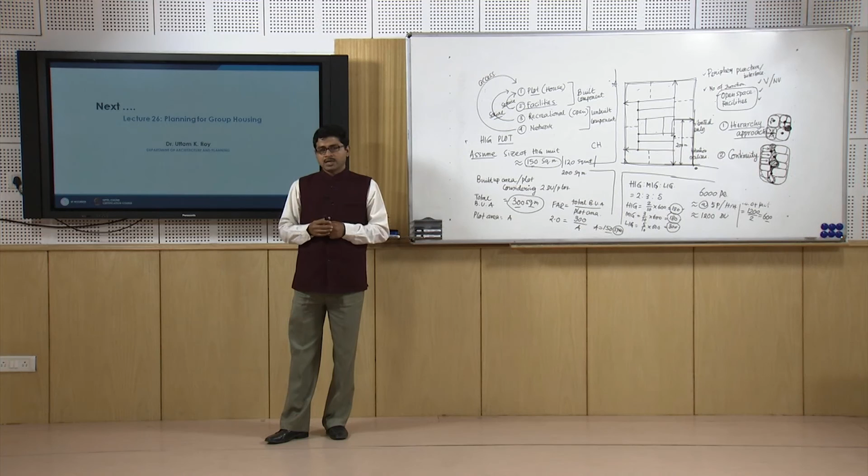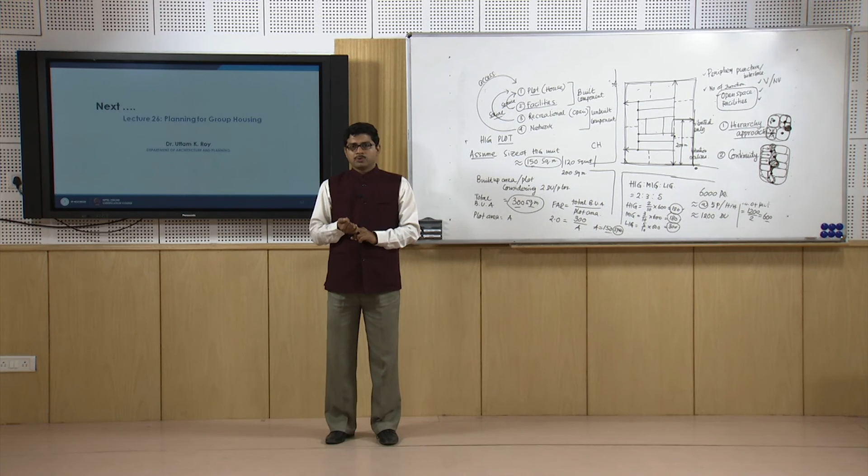So today we discussed the basic principles of plotted housing. Two fundamental approaches were discussed: one is the hierarchical approach, where planning is done in a hierarchical fashion; another is the continuous approach, where facilities are provided in a continuous recreational open space. The open space and network basically make the unbuilt component, whereas the buildings and facilities make the built component of plotted housing. We also discussed how to calculate the number of dwelling units and the size of the dwelling unit or plot, based on some assumptions and overall guidelines given by the housing strategy.

So next day we will discuss the principles of group housing. Thank you for today.